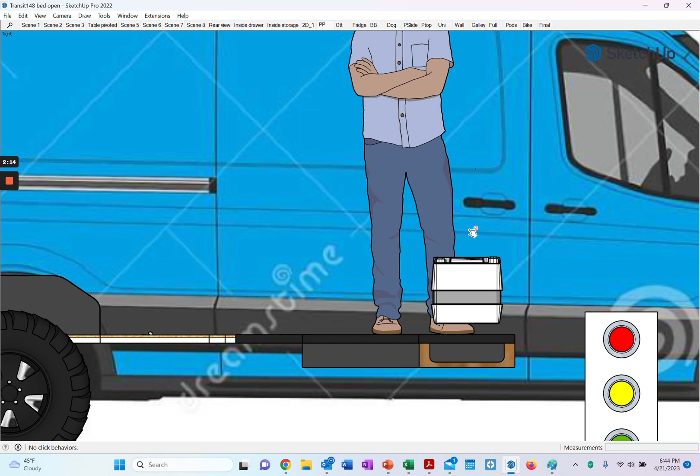So yeah, one of the first things we're going to put in the van is something to take care of the call of nature. We're going to put a Thetford porta potty in there, and it's not going to be suspended in space like this drawing shows it. We're actually going to put it inside an aluminum extrusion enclosure, which is going to close it off on three sides. It will be open on one, and it will have a board cushion top. You remove the board cushion, use the porta potty, put it back, and the porta potty goes away.

So that ottoman will be really nice for getting your legs up and getting a little bit more comfortable in the van, in addition to hiding the porta potty. The next thing we're going to be doing is putting the fridge in, and also a trash can. They kind of work hand in hand, because we're actually using part of the tie down system for the fridge to hold the trash can in place so it doesn't go flying around the van.

Underneath the fridge, and we're using an Iceco 60 liter, is a little cabinet that we're calling the fridge riser. And not only does it raise the fridge up so it's easier to get inside of it, but it also encloses the Webasto Air Top heater, and that's going to be drawing fuel from the vehicle fuel tank. And next to that is a shoe cubby, which will have a little light hidden up here with a red component, so we can leave that red on and have that be a night light at night.

We're using a continuous strap, cinched down, pretty standard actually for holding fridges down, but we are going to do some custom brackets here to hold that in place, and we're actually using the other bracket to hold the trash can. I'm not showing it because it's behind the ottoman from this view.

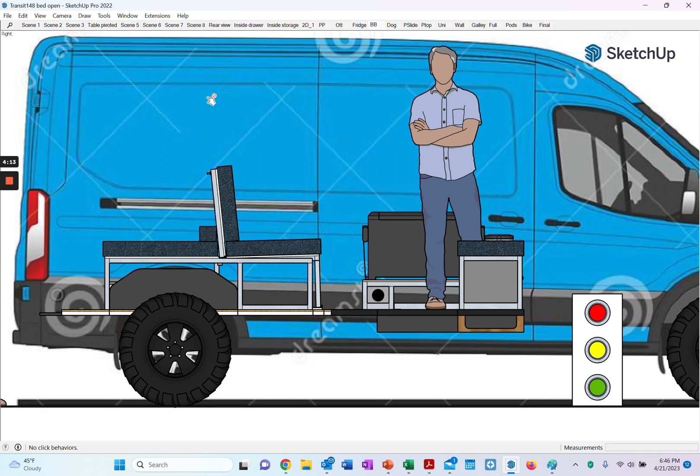Okay, so what's next? This thing that we're calling the bench bed, and it's a rock and roll bed. Part of it is fixed, has a fixed frame, and this cushion is fixed. It sits on a frame that's fixed, but there's a dynamic component to it that is meant to move, and part of it's going to be pinned at the top to furniture into the van walls. But when you unpin it and pull it out, there's a slide point that moves along this T-slot that's part of the fixed frame, and it can slide out.

And let me show how that works. So it's pretty simple. You just slide it out, and while you're sliding it out, the back actually swings down, and you can see just here, there's a little part of the frame here.

It's a little component that's actually going to be attached to the frame. That's going to keep this back part from going down, so it can only go to flat, or perfectly horizontal, and no further. So let's rotate that and show what that looks like.

Okay, so these cushions are going to be 4-inch foam, Dacron wrap foam, probably with a Sunbrella fabric, and they're going to be attached to the Baltic birch behind it with Velcro. And because of the nature of this, there's going to be a gap. So this thing is our gap filler cushion, done the same way, same fabric. It stores loose behind the back of the bench, and then when you need it for sleeping, you stuff it into this gap, and that finishes the bed, makes it ready for sleeping. So let's just show what that looks like.

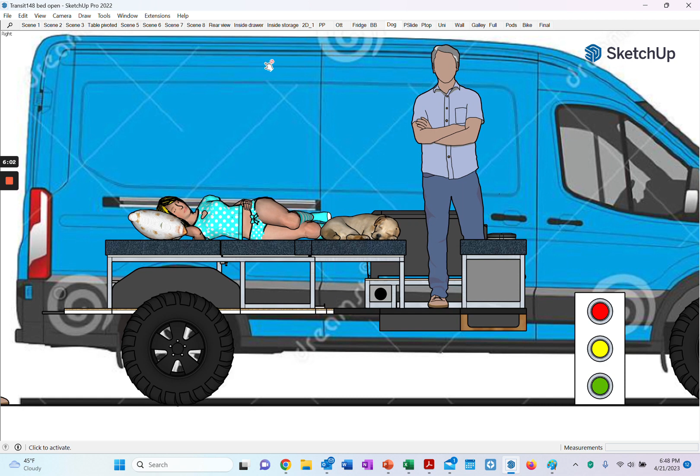Okay, so not my girlfriend, but simulated girlfriend. And just to show a figure sleeping on this to give you an idea of what that looks like, there's plenty of room on this bed. Certainly enough room for one person and a dog. Actually, not my dog, but that's what I could find in the 3D Warehouse. And possibly enough room for 2 people if you don't mind getting cozy.

The bed itself is wider than a twin, but not quite as wide as a full. But it's longer than a full. It's about as long as a king size bed, so it's got a lot of length to it. Also, there's a nice gap here between the ottoman and the end of the bed to move in and out of the van. That's the step for the van right there. And by the way, this is a cubby for dog related things like leashes and bags and maybe flip-flops and stuff like that. That all goes in there.

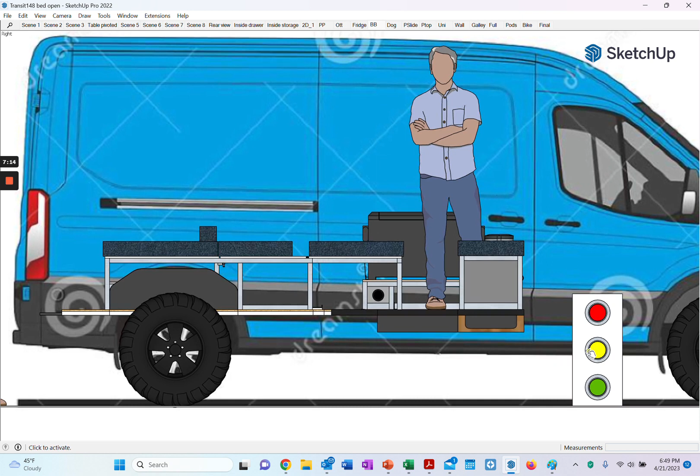Okay. I said I was going to try and move through this a little bit more quickly than normal, so that's what I'm trying to do. So let's go back to this mode, and I will rotate things back, slide back the bench into sitting mode, and let's look at the next thing that we're doing.

So boy, the last video I spent way too much time on this. I have other videos where I talk about this thing that we've done, which we call the power slide. But basically, it's a drawer that's attached to the bench bed, with 28-inch heavy duty lock-in lock-out slides. Part of this drawer is storage. Part of it is key electrical components.

It's all going to be built on the bench and wired on the bench, which will make it so much easier. And then we just install it as part of this furniture, lift it into the van, bolt it down in the van, and then connect all the wiring to the rest of the wiring runs and the distribution that we have in the other furniture. So I spent a lot of time thinking about this, and I think it's going to work out just great.

As part of this, there are 2 lids. There's 1, there's 2, and those lids, let's take them back, create a nice flat surface for cooking. So this is meant to not only provide the storage and easy access to electrical, but also an outdoor kitchen. So you can put the induction cooktop on here and cook, and there's going to be an outlet back here to plug that in.

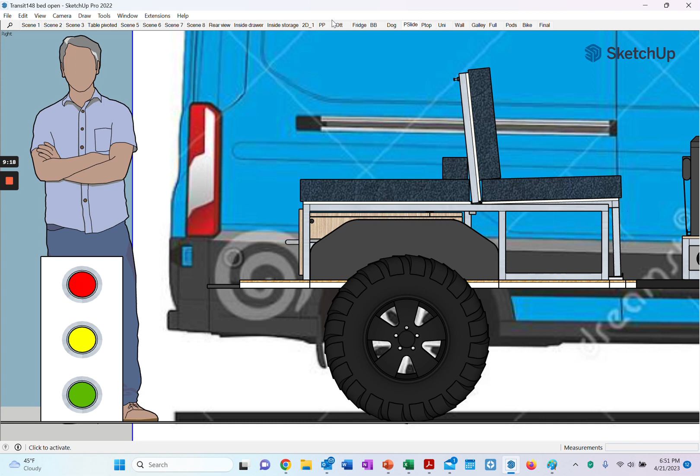Okay. So really the big, expensive thing that makes this whole van work is our field van motorized pop top that we're going to have done down in California. And it's going to take a while before we're ready to do this. Unfortunately, it's not something I can pull the trigger on right away because it's just expensive. But this is going to provide lots of extra headroom. It's going to provide lots of additional ventilation.

And there'll be lighting that's built into it. And as part of putting in the pop top, there will be sort of a flat soffit, I guess is the best way to describe it, or flange that goes around the opening for this. So essentially the majority of the roof of the van goes away, and it's replaced by the structure of the pop top. That flange around the pop top is a nice place to mount things to, and I'll talk about that a little bit later.

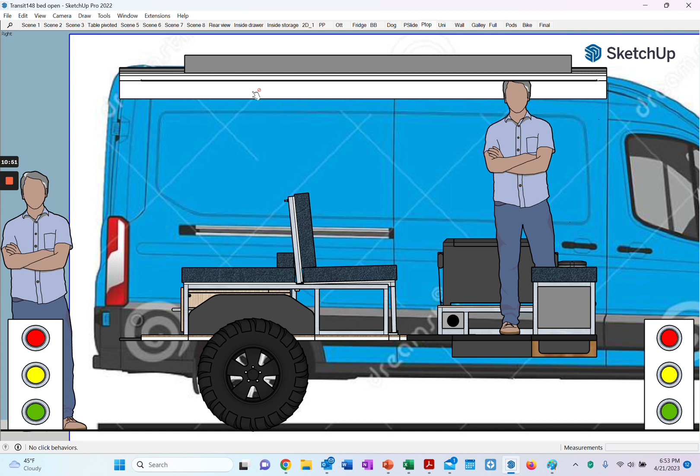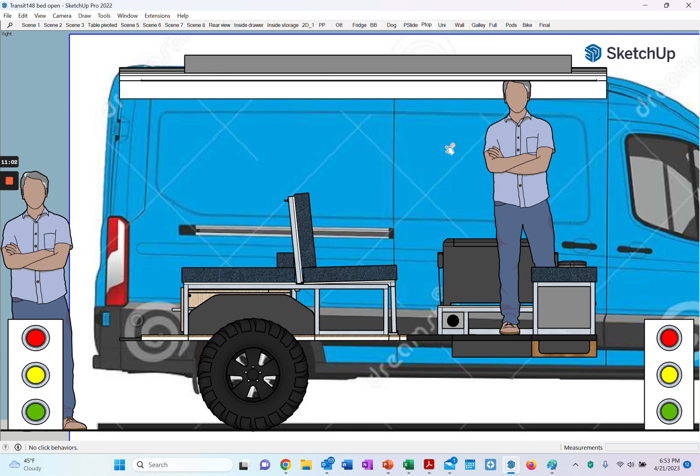But we can't do anything with the walls, and we can't do anything with full height cabinets until that's in, because we don't know exactly what our limitations will be. I have a pretty good idea, but I don't know exactly. So once we get that in, then we can start doing things related to the walls. But what we can do is we can insulate. So the walls will all be insulated; like I said, we're probably going to spray with Lizard Skin, and then we're going to put the Thinsulate in there. It's going to be a really well insulated van.

But the next thing we'll do after that is a couple things on the walls in preparation for the wall panels and the furniture. So in preparation for the wall panels, we'll have this special gang of anodized aluminum U-channel. It's actually a gang of three separate U-channels that is going to capture the bottom edge of the top wall panels and the top edge of the bottom wall panels. And I think that's going to be really nice. It's going to reduce the number of screws that we're going to need or have visible.

Underneath that is going to be some Unistrut. And the Unistrut is just there to mount the furniture to the walls. And there's two pieces that are mounting to the walls, the galley module and the full height cabinet module. They'll also be bolted to the floor of the van as well. So we're doing both. And then after that, we'll actually put the walls in.

Now, we're also going to put a CRL window in here on the driver's side. Not sure what the timing of that will be, but it will be before we put these wall panels in, because we really can't do anything in terms of finishing out the trim around this window until that window is in place. The window has to be in place first. So the window will go in first, then we'll put in these wall panels.

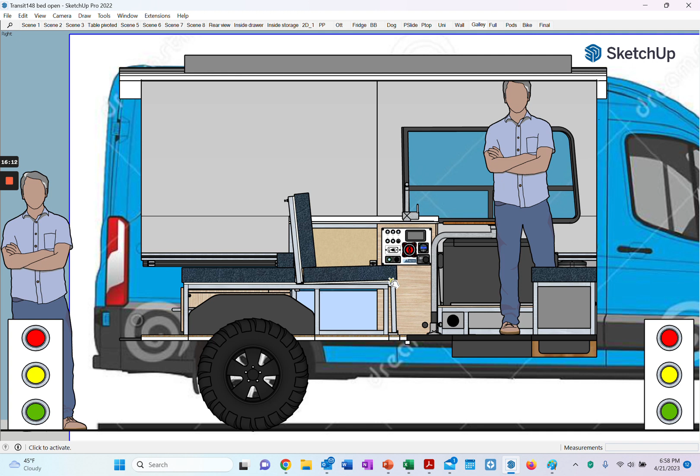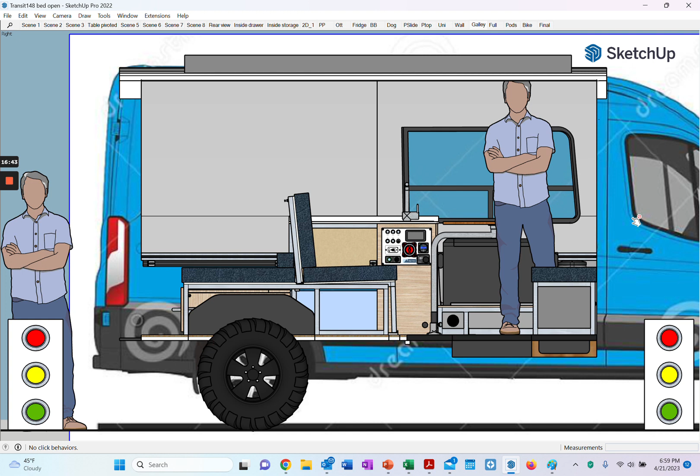And that's important because when we're opening up the bed, like I said, do this. You can see that it kind of comes across where the leg is for the pivot table. So we need to move that leg in order to allow this bed to be pulled out. So let's pull that back. So that just relocates to another position. Also, it's good if you want to use the table while you're sitting in the front seats, rotate it around facing the back. So that'll be nice too. Okay, moving on. Spent a lot of time talking about the galley, trust me.

All right, so the next big kahuna is the full height cabinet, which is going to have a hanging locker, a 3-shelf storage area with a tambour door to close it off, and an open sort of cubby space, which we think is going to be great for soft items like pillows and comforters and sleeping bags, and all sorts of puffy stuff can go right in there and be held in place just by friction. The bottom panels for these storage areas will be removable, so you can get at all the stuff that's happening under here.

And there's a lot of stuff happening under here. You can partially see the hot water heater. It's going to be over here. But what you can't see is the air compressor that's going to be located below there. There's DC distribution. It's part of the electrical system. There is a subwoofer that's going to be part of the audio system that's going down there. So there's a lot of stuff happening under here, and you really need to be able to have access to it, just in case. So that's why those panels are removable.

There is a waterproof cover AC outlet, waterproof because we're going to have an outdoor shower, and there's going to be a little holder for the shower wand up there. The controls are on the other side of that AC outlet. As I said before, there is a 4-gallon hot water heater. It's a Bosch unit. It is 110 volts, so it needs an outlet. We're going to use a smart outlet with a remote control, so we can turn it on and off remotely without having to reach in there and unplug it. So there's an AC outlet buried in this furniture that you can't see. So that is the full height cabinet.

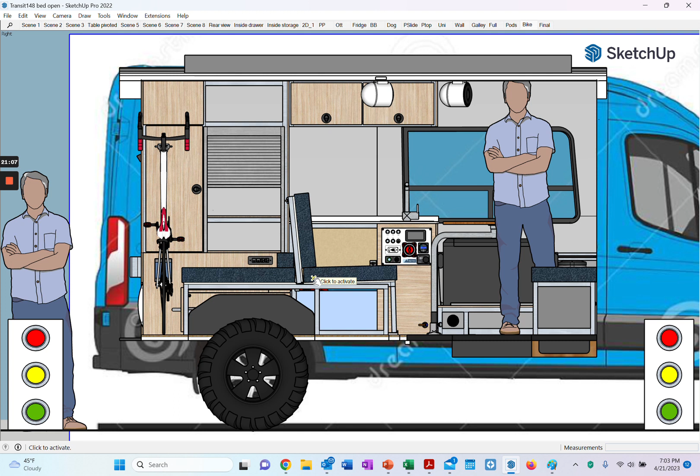Okay, so that's that. Last thing I wanted to show is this. So thanks to the good folks in the Ford Transit forum, I was able to get access to a model of the shell of the Transit van, and I made some modifications to make it medium roof size. I also made the opening for the slider and a reasonable facsimile of the slider door, although it's not exact, but it's close enough. The reason why I did this is I wanted to give both myself and other people an idea of what the interior of the van looks like from the outside. And this is essentially just one big open space.

The only piece of furniture that's in that opening is this little ottoman, and that's movable. If you're at camp, you can even take it out of the van and put it around camp, even with the porta potty in it, because the porta potty is not that heavy. So just have another seat around camp if you want to, and that would open up this slider completely.

And as you can see, when the bench bed is in bench mode, sitting mode, it's completely hidden behind that door. It's completely out of the way. And one of the pod speakers is completely out of the way too. The other one is on the other side of the van, so that's not a big deal. So there's really nothing in this space which is a hindrance to getting in and out of the van. There's no galleys, there's no furniture sticking out that's occupying a big chunk of the opening.